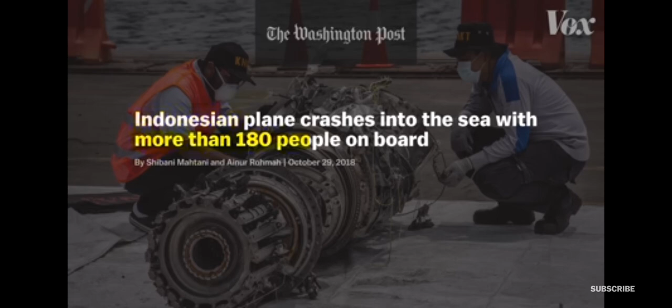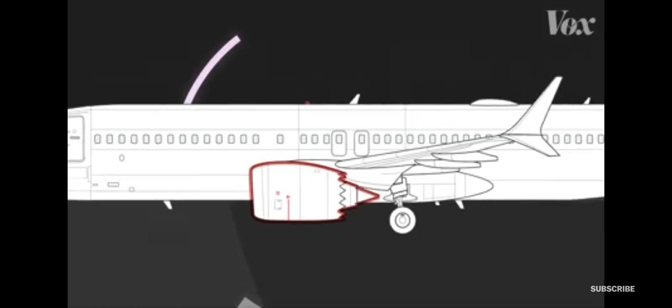This was just a few months after another flight, Lion Air 610, crashed in Indonesia and killed 189 people. These two flights were operating the same plane, the Boeing 737 MAX 8. And its engine is key to understanding why this particular plane has caused so many problems.

But there's nothing actually wrong with this engine. In fact, airplane manufacturers raced to put them on their new planes. That's where the problem started.

The two biggest airplane manufacturers in the world are Airbus and Boeing, and they have a fierce rivalry. If one of them can offer a better plane, the other could lose a lot of money. That's exactly what was about to happen in 2010.

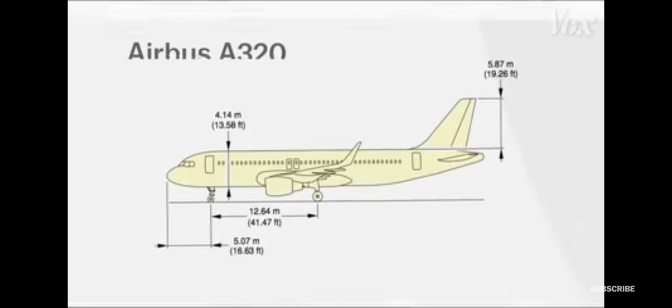Airbus announced that they would update their most popular model, the A320, a single-aisle airplane that services many domestic flights. You've probably been on one.

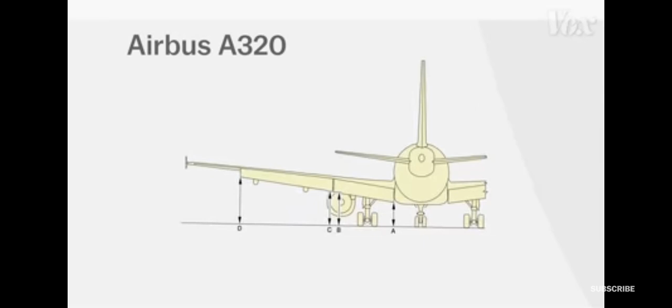For this new plane, Airbus had a big update. It would have a new kind of engine, much larger than the previous one, but it would make the plane 15% more fuel efficient. Just as importantly, this upgrade wouldn't change the plane that much. A pilot could walk into the new model with little additional training and be on their way. It was called the A320neo, and it would save airlines a lot of money.

This was a problem for Boeing. To compete with Airbus, Boeing's obvious move was to upgrade the engine on their single-aisle plane, the 737. But there was one issue.

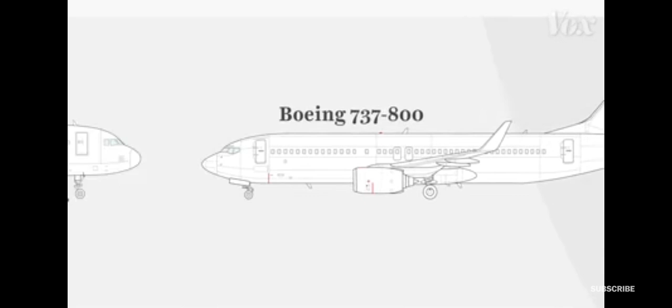Here's a sketch of the 737 next to the Airbus A320. Notice how the 737 is lower to the ground than the A320. This meant Airbus could slide a new engine under the wing of their A320, but there wasn't enough room under the wing of the Boeing 737.

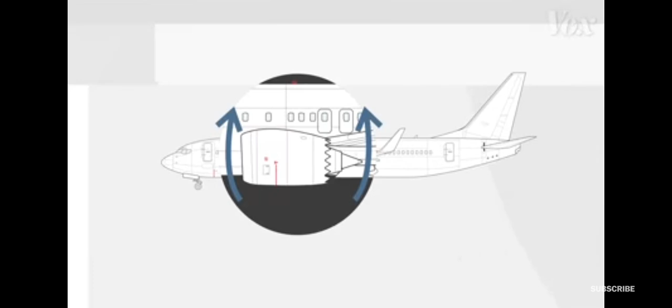But a few months later, Boeing's product development head had big news. He said, 'We figured out a way to get a big enough engine under the wing.' Their solution was to move up the engine on the wing so that it would be slightly higher, and it would fit on their 737s.

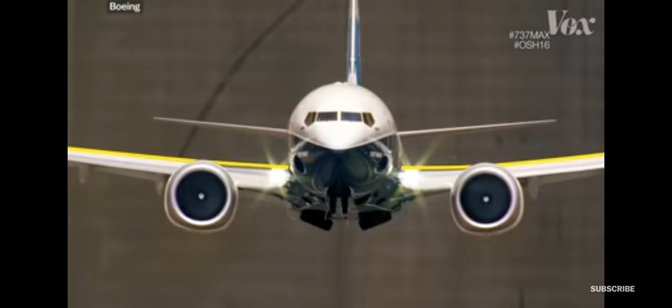Here's a promotional video of that updated 737 in the air. You can actually see that the top of the engine is above the wing. Boeing called this model the 737 MAX.

And just like Airbus with the A320, Boeing said that their new plane was so similar to its predecessor that pilots would only need minimal additional training. The 737 MAX became the hottest selling plane on the market, and it helped Boeing keep up with Airbus.

Except moving the engine up on the 737 had a side effect. When the 737 MAX was in full thrust, like during takeoff, the nose tended to point too far upward, which could lead to a stall.

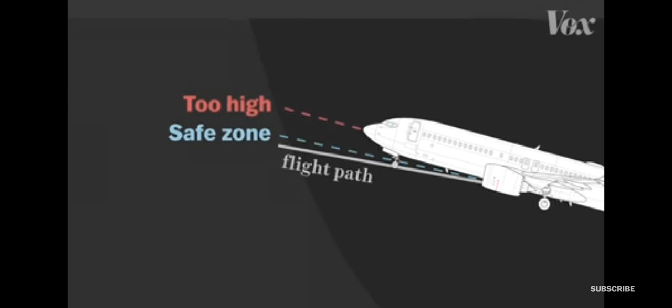This was a problem because these planes were supposed to behave exactly like the old ones. So Boeing came up with a workaround. Instead of re-engineering the planes, they installed software that automatically pushed the nose downward if the pilot flew the plane at too high of an angle. They called it the Maneuvering Characteristics Augmentation System, or MCAS.

But because Boeing was selling the 737 MAX as pretty much the same plane as the 737, they didn't highlight the new MCAS system. Many pilots only got a 2-hour iPad course before entering the cockpit for the first time, and the training material didn't mention the MCAS software. In 2018, several American pilots complained to the federal government that the 737 MAX was suddenly nosing down.

On October 29, 2018, Lion Air Flight 610 took off from Jakarta. In the flight report, which shows the plane's altitude over time, you can see that the plane was in full thrust during takeoff. But at a certain point, the nose of the plane kept lurching downward.

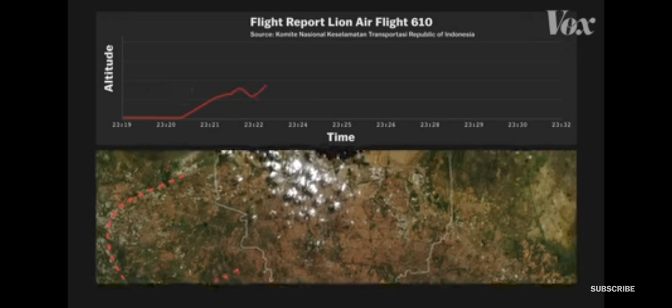The pilots couldn't figure out why this was happening. The captain asked the first officer to check the quick reference handbook. They couldn't find the solution. The pilots continued to fight with the MCAS. The plane struggled to gain altitude.

Reports show it was likely because the computer was getting incorrect sensor data, pushing the plane toward the earth below. 12 minutes after takeoff, the plane crashed into the Java Sea.

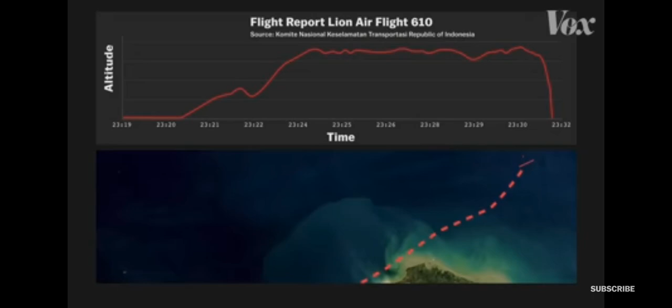In the Ethiopia crash, the report shows that the pilots were actually able to disable the MCAS, but it was too late to overcome the malfunctioning MCAS sensors. For now, nearly every 737 MAX 8 in service has been grounded.